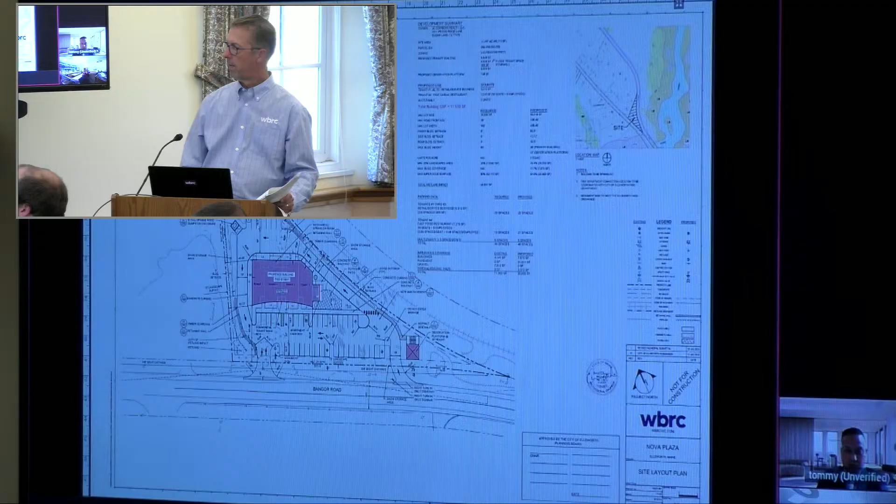We do have 2 entrances. One is limited to right turn entrance only. It does allow circulation around the building for deliveries, access, as well as fire. We did provide 2 turning movement diagrams that show that both the ladder and engine fit around the building for life safety and fire access. The proposal really is to get folks in, get them parked, and enter the building, and then employees are generally expected to park in the back, with service and deliveries in the back.

The bottom right corner shows a small observatory platform. The view is probably not as important as its purpose, which will be to allow folks to do their social media snapshots, etc., as they arrive in Ellsworth. It does have a view in the fall of the railroad and the trestle, etc., that our client has found quite interesting in the corner, and we think that'll be an added amenity to the property.

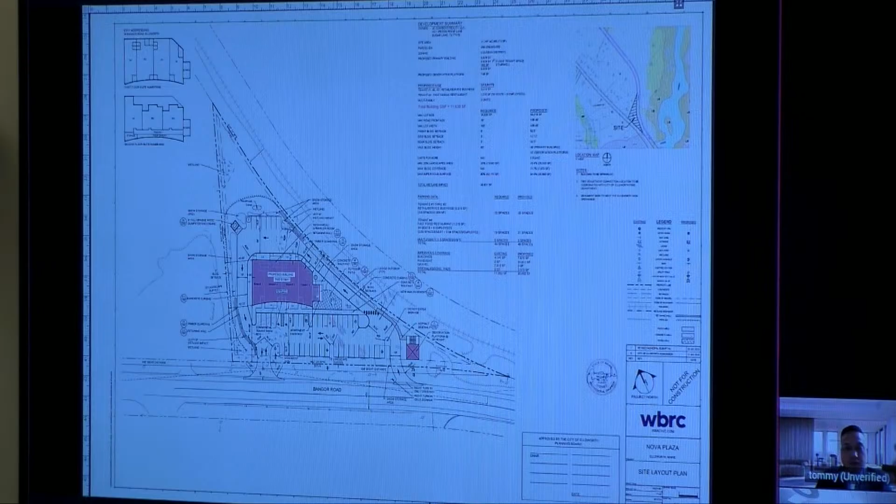We did include a grading plan that shows existing and proposed contours. Generally speaking, the drainage basically flows in all 3 directions. We're a triangular shaped parcel here. We have designed with roof drip filters, as well as under-drained edge filters on parking. Runoff will continue to go in the same 3 directions, and our post-development runoff is just slightly below pre-existing conditions.

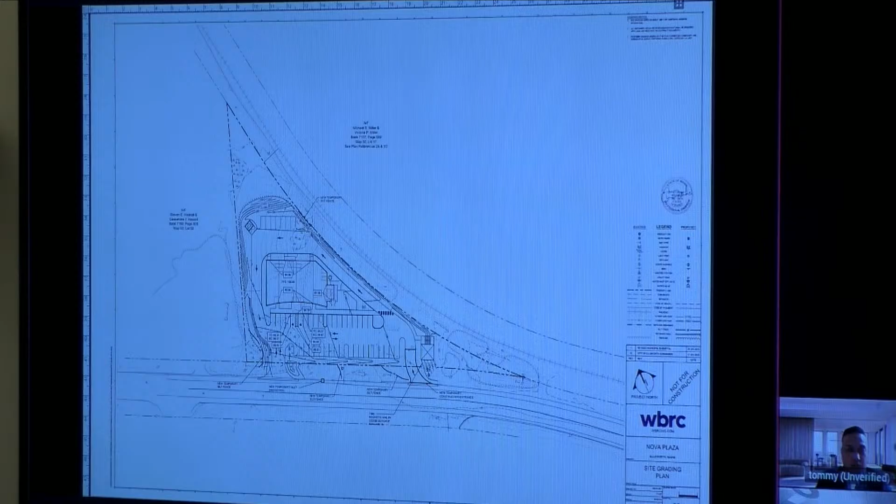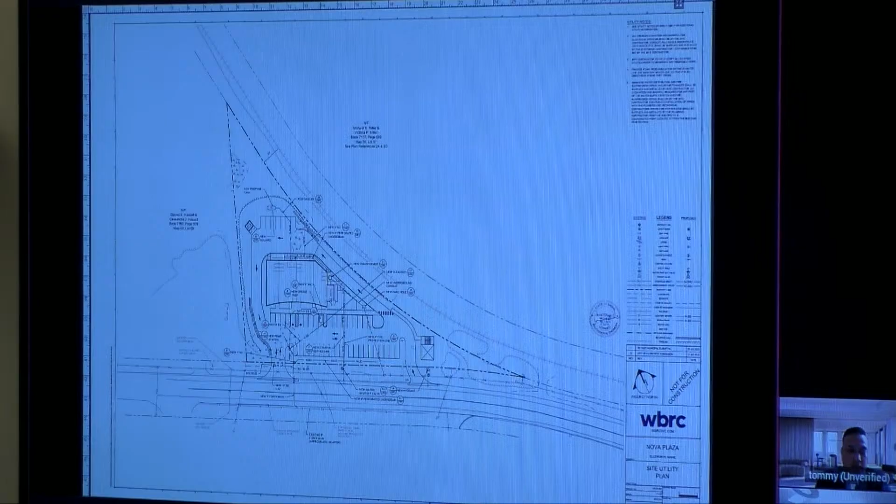This is the utility plan. We are showing municipal water connection that includes domestic and sprinkler. We are proposing a new hydrant due to the distance away from the next nearest adjacent hydrant, at over 500 feet, about 630. So immediately as you turn into the property, if you were responding, chief and crew would be able to pull on the hydrant just near the right turn entrance only into the property.

We also have capacity to serve letters from the water district as well as the sanitary. The sanitary will be a force main tie-in. We will have a private pump station on the property that will tie into the main that's out in Bangor Road.

Other utilities include on-site propane, which will have an underground feed to the building. We do have grease traps for the fast casual restaurant as required by code, and the rest is tied in a traditional sense with sewer exiting out the front into that private pump station. Other than that, there is a culvert crossing, and we did provide lighting photometrics in the set for the on-site lighting, all of which have either cutoffs or downward facing fixtures. I believe the cut sheets were provided as well in the packet.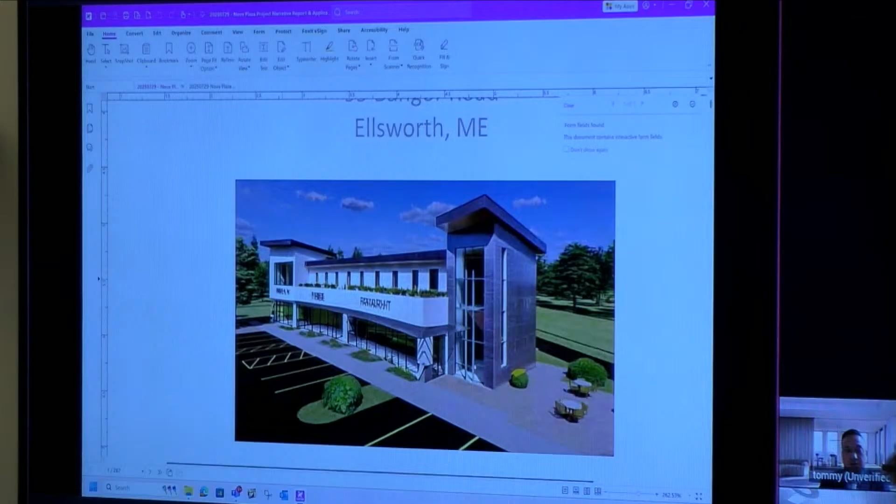All right. And would you expect, for the observation platform, that anybody would grab a meal and go up there to eat? That is more reserved for the apartments on top. No, I think you most likely mean the platform—the standalone observatory to the southeast, the one overlooking the trestle.

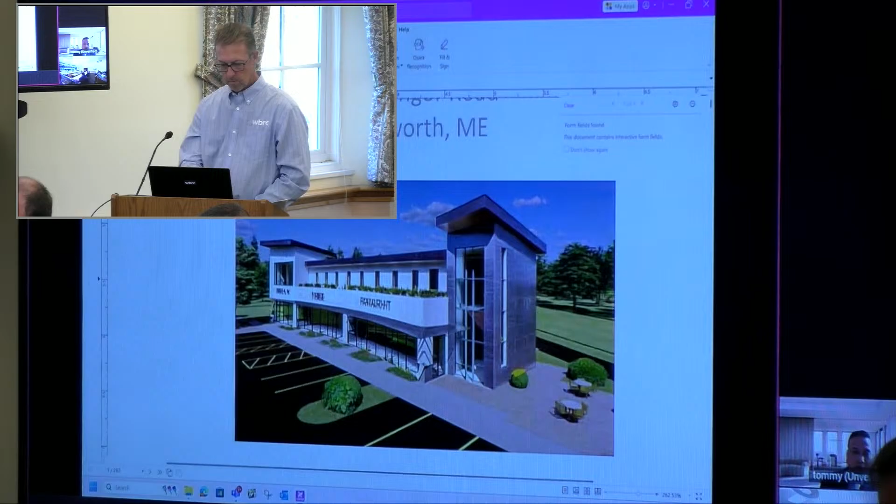That's the one you're referring to? Yeah, the observation platform. Just put- Oh, okay.

An observation platform, yes, that's basically for the general public to take pictures, as well as we're gonna put signs up for Nova Plaza, Ellsworth and whatnot. That's a little bit more of the marketing side, to get people to post on social media. My wife thought it would be a great idea because this will help promote Ellsworth as well as our plaza, get the name out there so that people can come and visit.

We're thinking maybe perhaps planting some fruit trees and things like that, so that people can have a little place so that they can take some selfies.

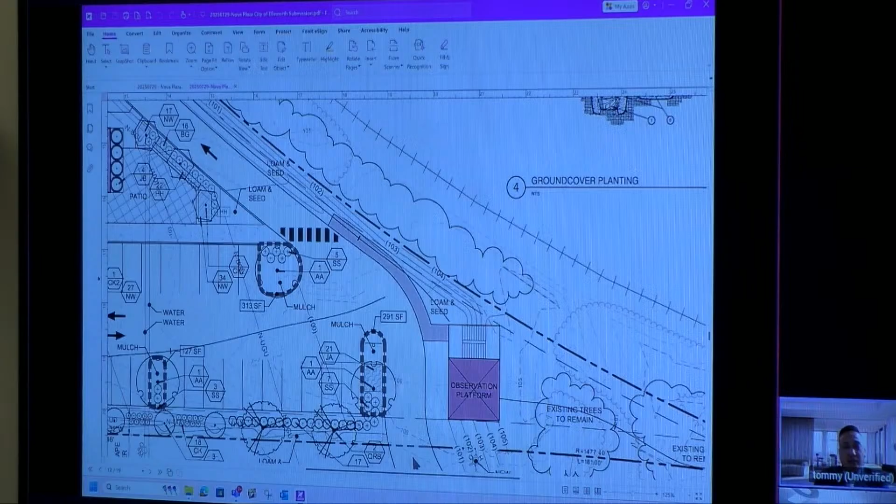But Mr. Tran, you wouldn't expect people to put chairs and tables there for people to get something from your restaurant, go out there and eat? I wasn't planning on that because we do have some tables and desks, I believe, on the side of the building, that they were gonna have a place for them to eat.

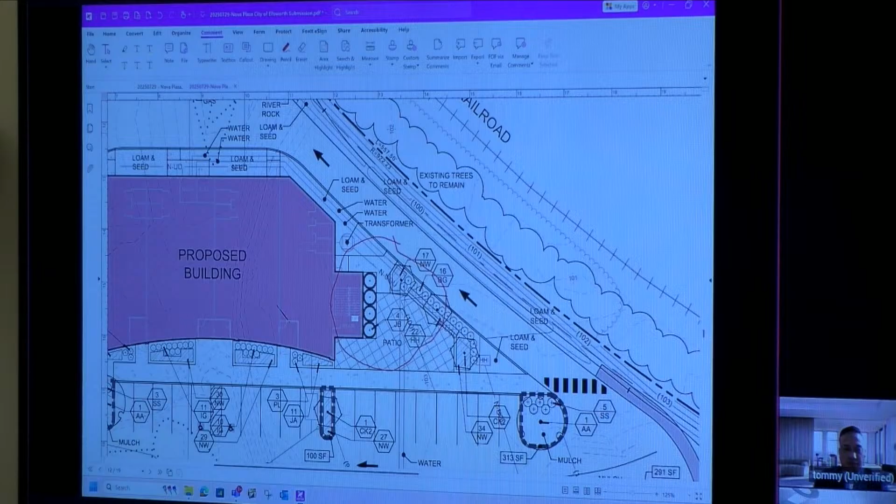Okay, thank you. Do you actually see people coming to this development to take advantage of the observation deck by itself? I mean, as a sole attraction?

I wouldn't be surprised, for oftentimes as many people stop on or near the bridge in the fall to take pictures. I wouldn't be surprised. I know some of you lived there for a very long time, and maybe perhaps these are people that are traveling far from the city or different places.

So for them, when I went there and saw the train and the train track as well as the foliage and the trees and the rivers, I thought it was so beautiful, and I took a whole bunch of pictures. I think sometimes if you live in an area so long you forget how beautiful it is. So I think the observation deck is just an opportunity for people to maybe stretch their legs as well as take some photos and share with their friends that they're heading to, let's say, Bar Harbor or Acadia Park, but along the way they went to this beautiful plaza and had a fresh bite to eat, and look how beautiful it is.

So that was the original idea, that it's an area where people can kind of rest and showcase a little bit of the beauty of Ellsworth.

Shop and eat. But those people would be using other things on the site, though. Hopefully. Because otherwise you have another generator there that you have not accounted for. That's a loaded question, so just so you know.

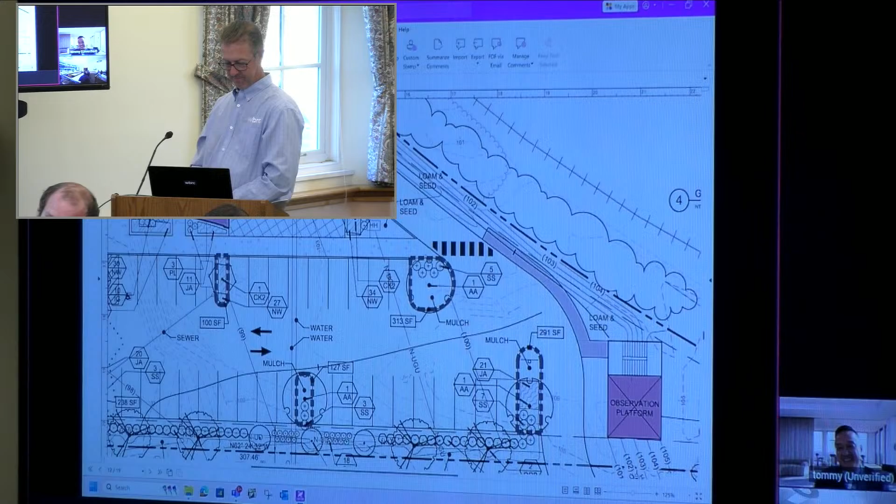Is this a covered platform, the observation platform? It does have a roof, yes. Does that roof- so is it 20 feet to the top of the roof or 20 feet to the floor? It would have to meet the height limit, but I believe we show one set of stair landings, so it looks like it's about 12 feet to the platform, and then you'd have the roof above.

Are there reserved parking spaces for the residents? They're not designated, but the parking to the rear is employee, and my presumption would be they'd be designated. We haven't talked about that assignment specifically, no. Okay.

But the combination of all the uses met the standard- I think the requirement was 44 and they have 46 for all the commercial uses and the residential. But if you have residences that don't have a marked parking space, you could run into a situation where they have nowhere to park because the spaces are filled, or they've got all their groceries and have to park on the far end and walk all the way around. So that might be something to consider, to designate those spaces to help the residents and the workers be able to function.

And how many employees are supposed to be generated with this? Like 2 per store, maybe? And then 1.5 for the residences, I think they calculated 1.5, so like 7 or 8.